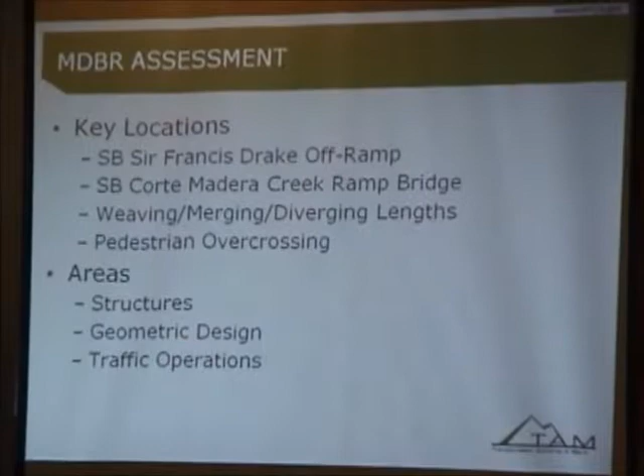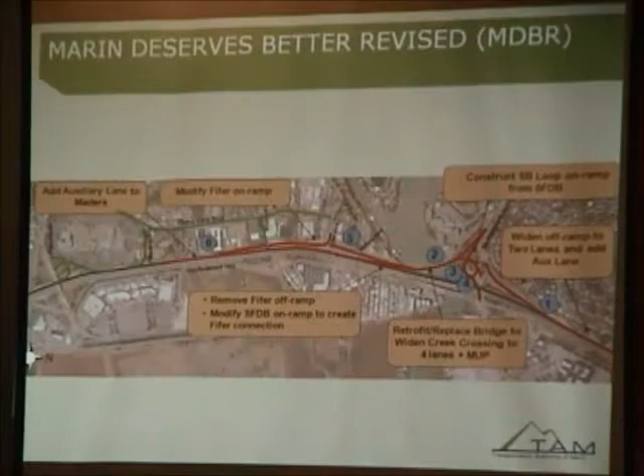This one's a little hard to see, but it shows the Marin Deserves Better southbound option. I'm pointing to Tamalpais Interchange. What's highlighted in red is the southbound improvements proposed by the Marin Deserves Better group. There are some interesting concepts in there that we looked at and found very intriguing.

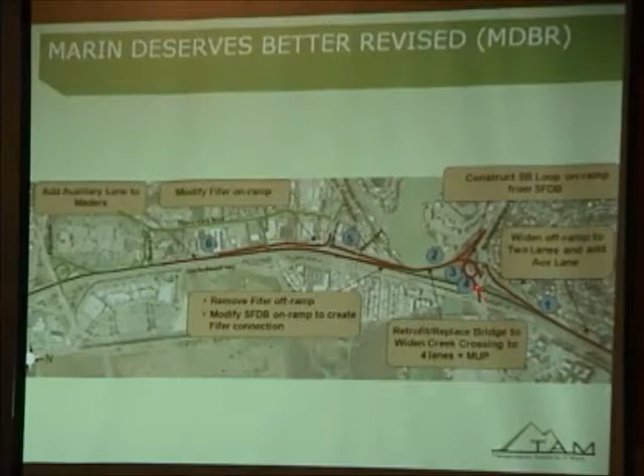What we found technically is that with this option, there's a need for widening the off-ramp at Sir Francis Drake and adding an auxiliary lane for southbound 101. That means actually widening the freeway with another lane on the right side. The feature also includes a loop on-ramp, a 2-lane on-ramp from the east side, and a 2-lane on-ramp from the west side, crossing the bridge, then connecting onto the freeway with 2 lanes merging to 1, then off-ramp to Fifer, and then on-ramp from Fifer to southbound 101 to Madera.

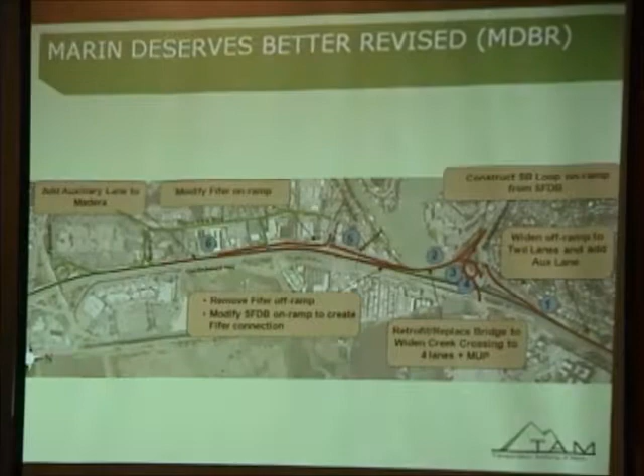The first location we looked at is the southbound Sir Francis Drake off-ramp. This is 101, and this is the southbound off-ramp to 101. For this particular proposal, looking at traffic volume from 2035, it shows that we need 2 lanes on that off-ramp. It also shows that we need to widen the freeway on southbound 101 approximately 1,500 feet, to get close to where the soil nail retaining wall currently is on southbound 101. This is needed because of the volume of traffic coming down from southbound 101 to that off-ramp.

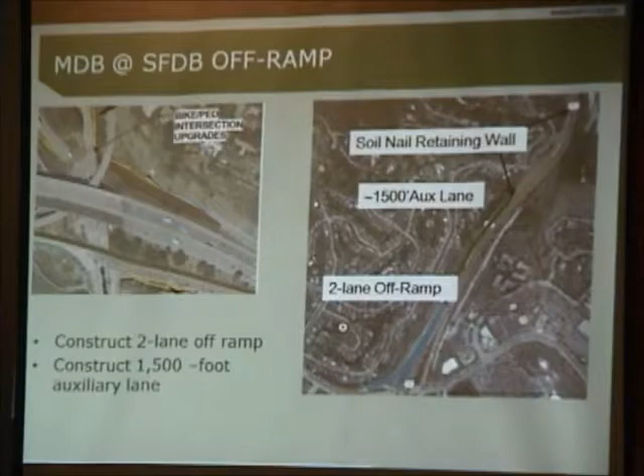The second location is the question about the bridge crossing Corte Madera Creek. We are asked to assess if we can handle widening to 4 lanes as proposed by this concept. That's actually 4 lanes plus a multi-use path, or MUP. The dimension we looked at is about 75 feet. That's looking at reducing shoulder width, because we want to make sure the width is as minimum as we can make it. We found that this width is more than the width of the current bent cap, or the elevator you see out there.

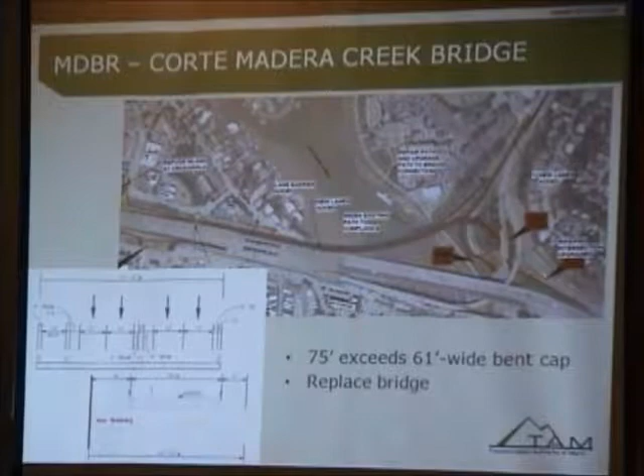The bent cap is about 61 feet. So we had our structural engineers take a look at that, and they reported back that with that amount of widening, the structure does not have the load carrying capacity. They're also concerned about seismic lateral movement of the structure. What they told us is that you could widen to the width of the bent cap, which is 61 feet wide, with some major retrofit of that structure. So with this particular option of a very wide structure, 4 lanes plus the MUP at 75 feet, you do need to replace the structure.

The third location we looked at is operations, which is really key to consider. With the concept at this location, there's a loop on-ramp. The concept is very good, however, when you start looking at traffic volumes for year 2035 and how it operates with those volumes, the loop ramp demand is 1,300 cars. The loop ramp is about 80 feet in radius, but ideally it should be at least 150 feet to accommodate that amount of traffic.

With that smaller loop, cars will not be moving as fast, and you will have some cars backing up onto Sir Francis Drake. We recognize - I wish we could make this much bigger - but with the constraints we have with the wetlands in this area, you sacrifice the capacity of that loop on-ramp.

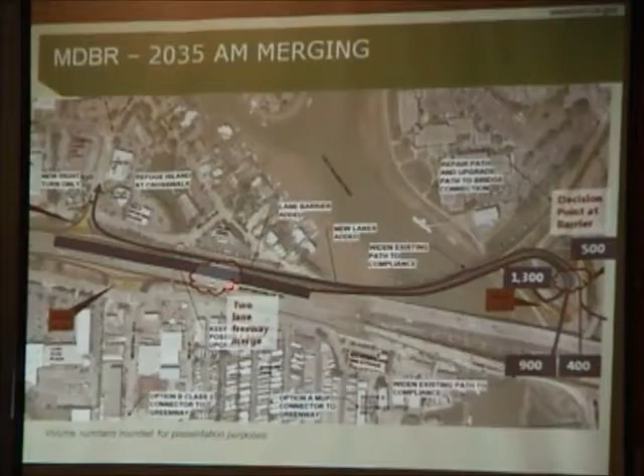In this section, as traffic enters and crosses the bridge and comes onto the freeway, we have a situation where 2 lanes come on and drop to 1 lane on the freeway before entering southbound 101. When you look at volumes, it's very heavy in that movement, so you have 2 lanes trying to squeeze into 1 lane before getting onto 101. That will create congestion on the freeway and also potentially back up traffic onto the ramps.

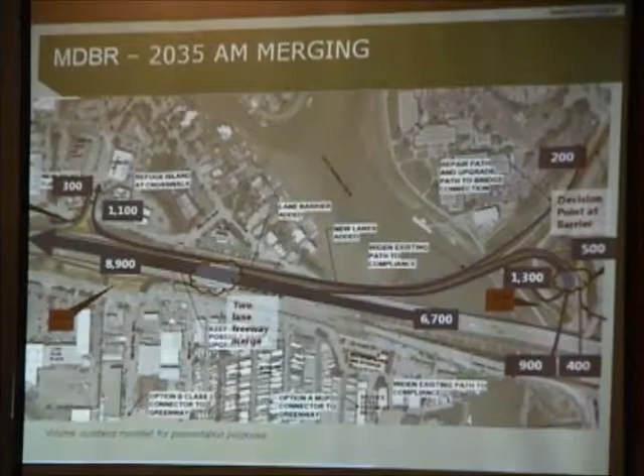Okay, this is another more blown-up shot looking at the loop on-ramp. We took a real close look working counting to see what kind of weight we could put on that loop ramp. The challenge and constraint is the environmental wetlands there. You can mitigate that and put a bigger loop in there.

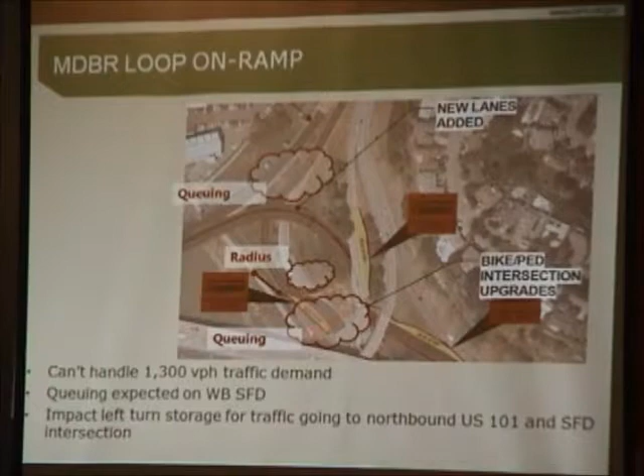Another consideration is the left turn location over here. There's currently traffic coming from the west that would queue on the left turn before getting onto 101. That's an important consideration because if that traffic backs up at the intersection, it's going to affect the whole operation leading up to the loop, and the traffic mix of the loop on-ramp traffic.

What's the purpose of the loop? The purpose of the loop was to provide for a movement from the west onto southbound 101.

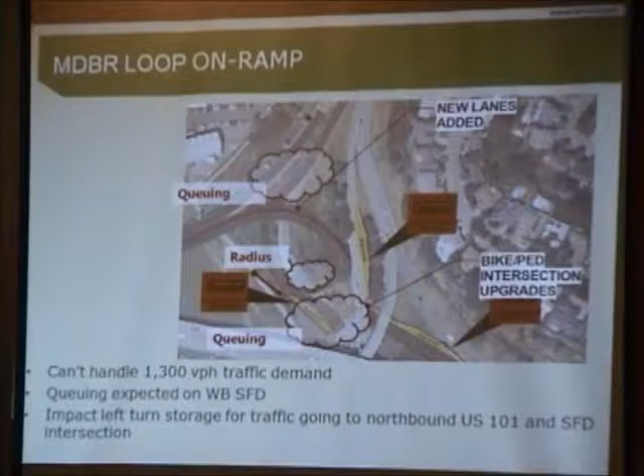Thanks, Brad. The fourth location was the POC. The question that was asked of us is, do we fit in the lanes needed and still maintain the POC?

What we found is we drew it up. This represents a geometric drawing of it. What it shows is that we're very close to that POC. We could fit it in with some design exceptions.

However, we're looking at how we really want to save that POC if we can. You need to look at what's happening at the northbound side as well, so you need to look at improvements on both southbound and northbound when you look at the POC.

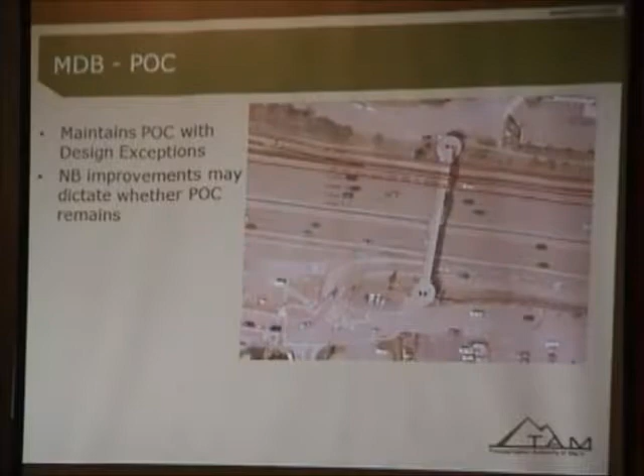So in summary, there are design exceptions. Like any design, we look very closely at designing everything to standard. There are situations where sometimes you cannot, and when you do design exceptions, you need to look at a lot of different factors in justifying it - traffic, environmental impact, right-of-way impacts, and the right combination of design.

The MDB already has a nice feature where they have a 2-lane coming off of 101 to Drake. You need that because you don't have the one off-ramp with the design.

The loop ramp that I touched on needs to be much larger to handle the capacity of 1,300 cars. The bridge needs to be replaced, unfortunately. However, there are ways to replace the bridges.

The bridge is reaching its service life, and so replacing it will be costly.

The weaving distance is another key point that I didn't really get into - when the Fifer on-ramp comes onto the freeway, and then there's a getting off at Madera, there's a short weaving. That section, although there's less traffic, needs to be further studied.

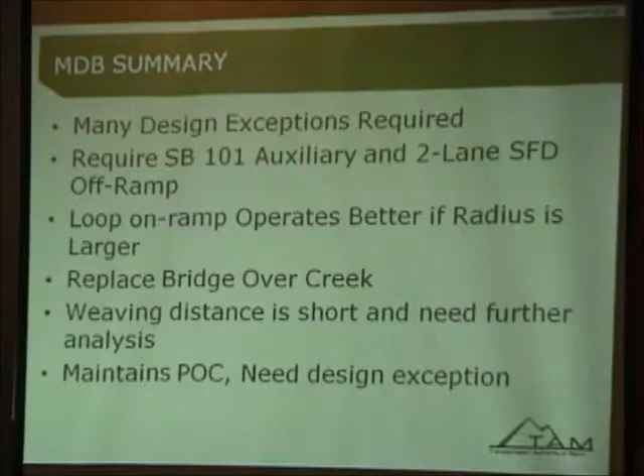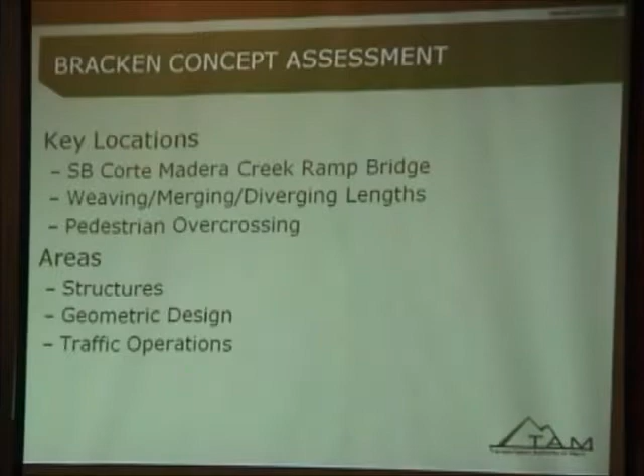Let me touch on the Bracken concept and summarize the assessment. Similar to before, we looked at the various locations, we looked at the bridge, we looked at the operation, we looked at the POC.

This slide shows the Bracken concept. It's pretty similar to the southbound option in that the concept tries to collect the traffic from the west and east as they cross the bridge. The Bracken concept has 3 lanes plus a multi-use path, and then provides an off-ramp directly to Nellen. David did that to try to provide that local movement from this side to the other side here.

However, when we start looking at drawing this up closer to geometric design standards, we find that we have to grade the ramps. And that's kind of where we got stuck, in terms of our current southbound concept of graded ramp and elevated structure at this point.

This one also creates a situation where there's a short weave from the on-ramp of Fifer to Madera, which is a concern, but we need to look at the operations to better assess that.

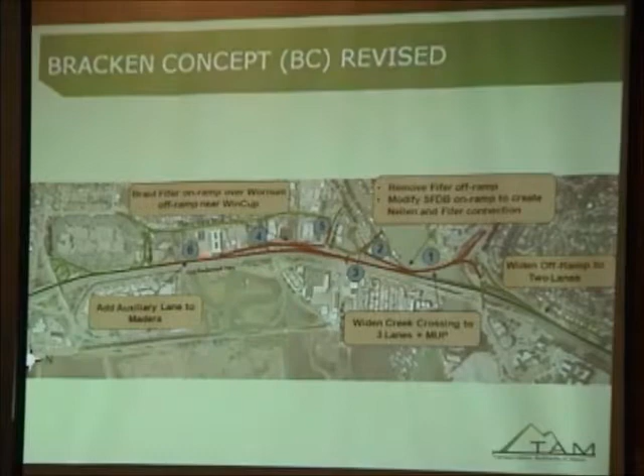Now we also looked at traffic operations, 2035. The numbers you see here are the forecast traffic volumes for 2035. The first point I want to highlight is this location here. There's a short weaving distance on the bridge. You have quite a bit of traffic coming from the west, 1,400 cars per hour, and 1,900 from the east side. They converge in a 3-lane section, and they have this weaving. There's 3 lanes of weaving here. We see this as a problem where that will back up traffic all around.

There's also a weaving section on the freeway because you have quite a bit of traffic coming on, and then you have an off-ramp to Wornum. But this is again short, and that will compound the issue with the capacity issues on the freeway. This in combination creates some congestion and backups on the ramp. Then further south, at the on-ramp to the area, you also have a short weaving distance.

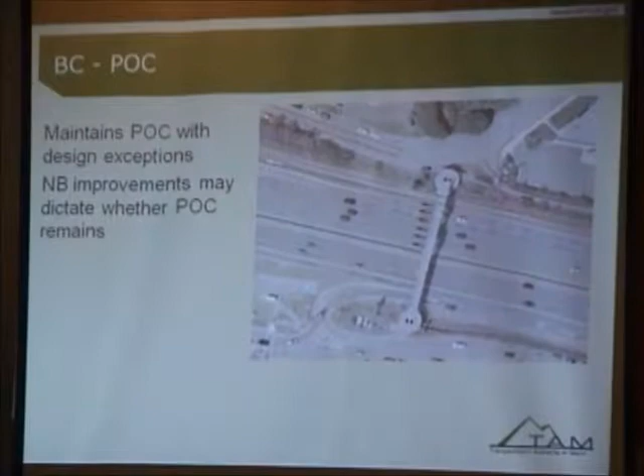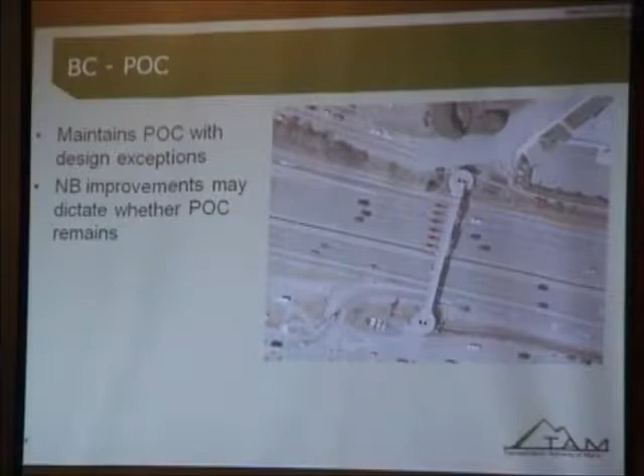In terms of the POC, we took a closer look at that as well. We drew it up and found that you could maintain the POC. Again, you need design exceptions - reduce shoulders, maybe reduce lanes. But the key point here is that with the southbound, to save the southbound POC, you need to save the POC on the east side. So you need to factor both into your consideration.

So to quickly summarize, I'll touch on those points. Design exceptions are needed. The bridge could accommodate 3 lanes with a multi-use path by just retrofitting the bent cap. Weaving is the issue here with this concept. You've got weaving on the bridge, weaving on the freeway, weaving on the Fifer on-ramp to Madera. And when you draw it up, you basically have a braided ramp.

The reason for that is the Wornum off-ramp has to be such that there's enough distance so that traffic can make that left turn from the Wornum ramp into Wornum. So that, in combination with the structured columns and the sight distance of the intersection, dictates where that intersection needs to be. And again, it maintains the POC with design exceptions.

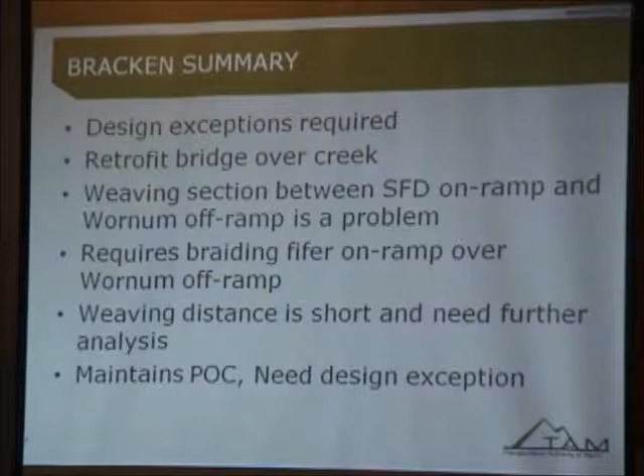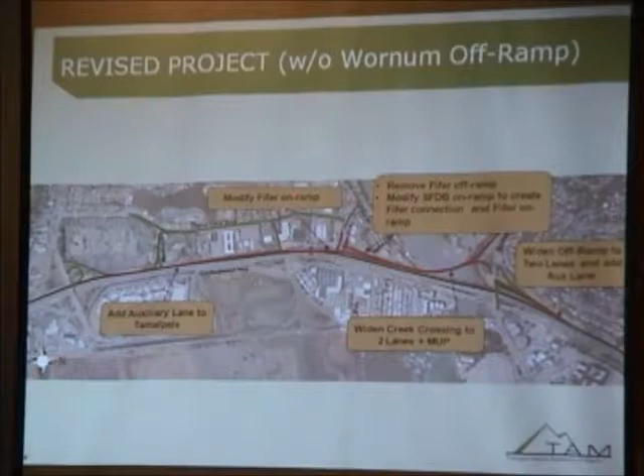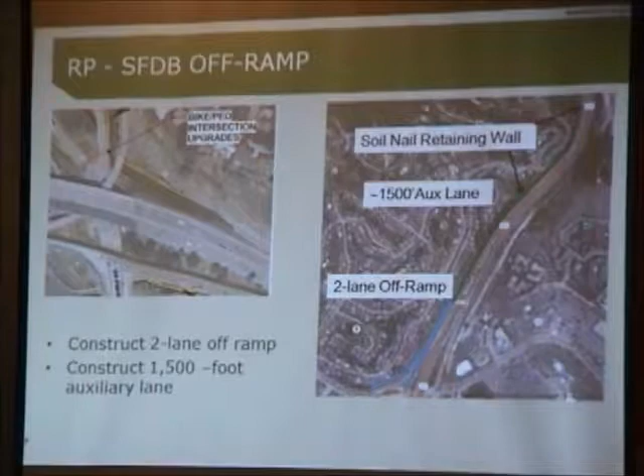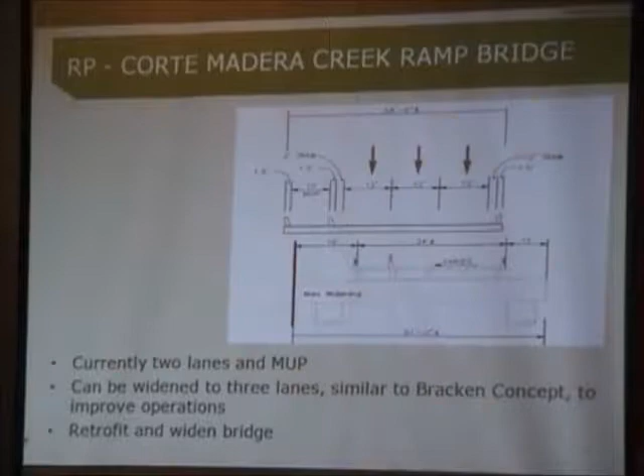However, because the structure can accommodate 3 lanes, the 3 lanes give you better operational characteristics with added capacity.

Now, this looks at traffic with the southbound revised, looking at the concept itself. Again, we're trying to handle the traffic coming out from the west and from the east with 3 lanes in this section. You may ask, how come that's the same as Bracken? However, the design is different. The design actually provides a much longer weaving section because the ramp comes off and connects to Fifer and is separated from the freeway. So in effect, from where the 2 ramps converge all the way to Fifer, you have room to handle the weave. Because of that, it handles more volume.

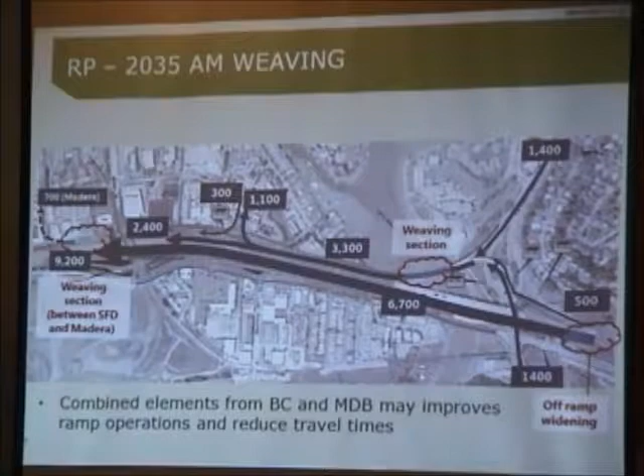This one also has the issue of the weaving section from the Fifer on-ramp getting off at Madera. What was done on this one was to mitigate that by extending the aux lane all the way to Tamalpais, which is not in the current permitted design or Bracken version.

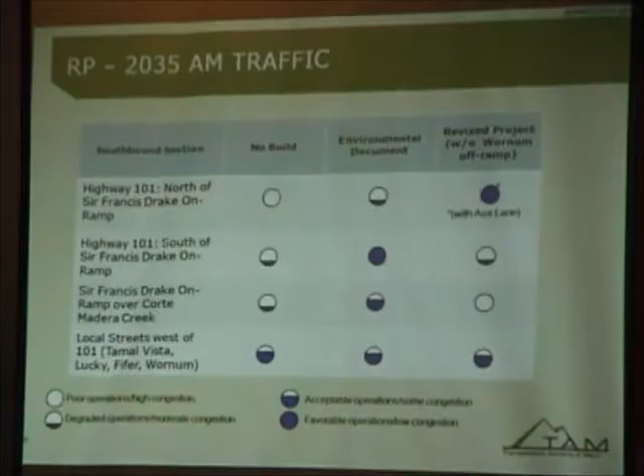I'm going to have Matt touch on the traffic aspect. We did a sensitivity analysis looking at traffic operation of the southbound revised, which is, again, southbound C without the Wornum structure.

Thanks, Guy. I'm just briefly going to talk about our comparison of this revised project without the Wornum off-ramp, to evaluate the traffic operations.

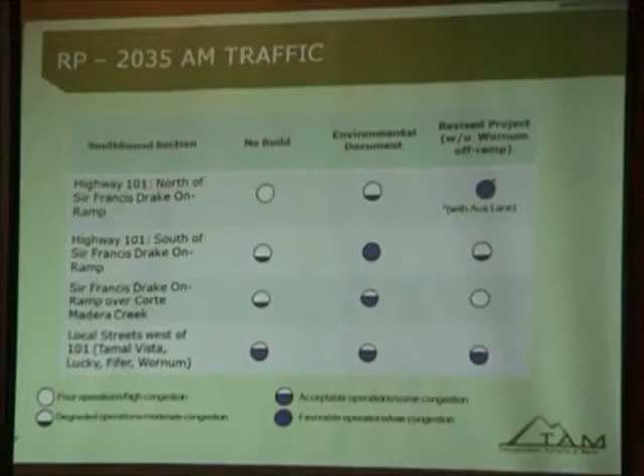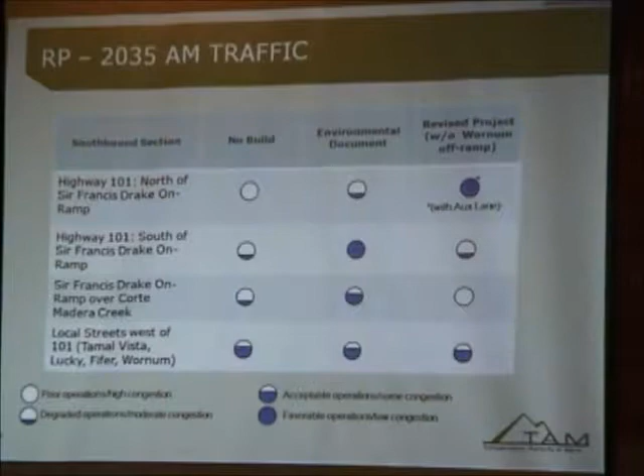So as you can see, when we do a comparison across the no-build, the environmental document project, and the revised project, the operations improve a little bit when we're looking north of Sir Francis Drake, and that would be due to the auxiliary lane that would extend through that area and improve operations up there.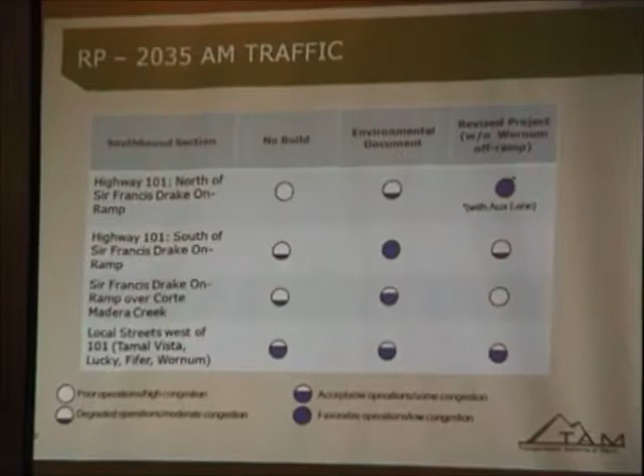However, when you look down south of the Sir Francis Drake on-ramp, you would have similar operations in the no-build and revised project, due to the weave section in between the new on-ramp and the Madera Boulevard off-ramp when you don't have that Wornum off-ramp as well.

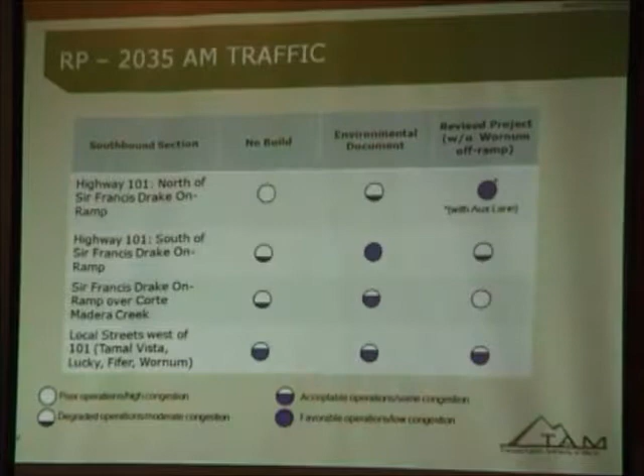When you look at the Sir Francis Drake on-ramp, the actual on-ramp section, you're going to see worsening operations in 2035 compared to the no-build, and that's due to the increase in traffic that would be using the Greenbrae off-ramp as well. Finally, local streets are expected to be pretty similar between each of the different alternatives.

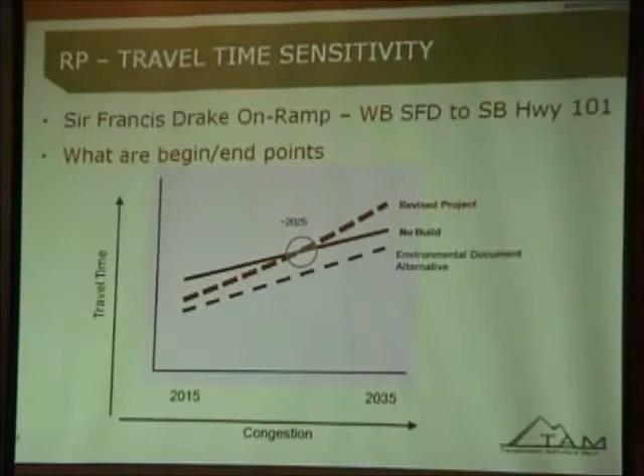We did do a sensitivity test to look at travel times coming from Ross Valley and found that, as I mentioned, the on-ramp from Sir Francis Drake would in fact be a little bit worse under the revised project, due to the increase in traffic using that on-ramp. However, we found that around 2025, if we extrapolate between when the project could be built in 2015 and 2035, the revised project would be about similar to the no-build. Then as traffic increases, it could get worse, and travel times could get worse on that segment.

Now I'm going to pass it back to Kai to wrap this up. Thanks, Matt. I'm sure you can ask a question about Matt's summary here—it's very complex in terms of what he did, but feel free to ask questions on that.

In summary, when you start looking at all the southbound options, I see some really good features in all the options. With the ability to widen that structure to 3 lanes, you have the ability to do some more in terms of addressing the issue Matt talked about, travel time for traffic coming from Ross Valley, Larkspur, onto the freeway. 40% was the travel time from the on-ramp to the off-ramp. Currently we only have 2 lanes; with 3 lanes, there's a lot more we can do.

From a design standpoint, a geometric standpoint, taking away the water wall frame structure opens up the opportunity to move the 2-lane collector closer to the freeway, thus opening more space where you can look at the possible POC while keeping the public right of way.

In short, we want to do some more evaluation of traffic operations, looking at all the key elements of the Marin Deserves Better and Bracken plan. Because, like I said, there are some really good geometric features. What's lacking is the traffic operation looking at all the combined features.

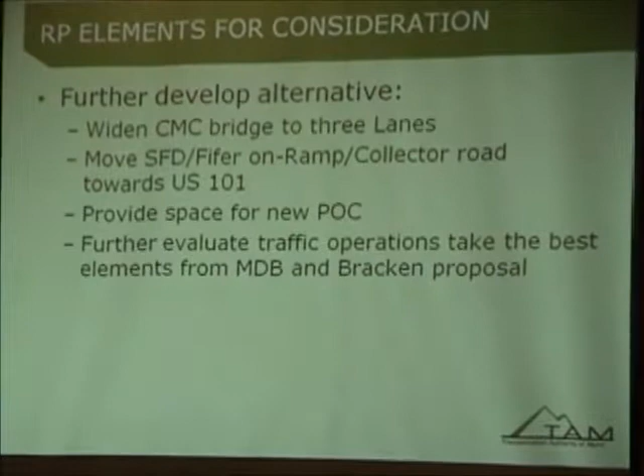Let me just mention this last slide for a second. In pouring through the various technical features of the southbound corridor—and it is complex—we have an original proposal and some new options we've considered. I want to emphasize to the working group that we think there might be a combination of features from the various proposals that could result in a project with a good life, a 20-year life for the investment, and that doesn't make traffic worse, which is what we're trying to do, or relocate the hazard from the freeway to a bridge or from the freeway to a collector road. So our instincts are to try to develop a package that takes in features from all 3 of these proposals. We'd like to spend a little more time on that and bring it back to the TAM board. We don't have all the details worked out, but we're hopeful.

So we're going to open it up to the working group for clarifying questions and/or proposals that you'd like the working group to consider. Go ahead.

On the information on the slide in front of us, would you be able to give some idea of the additional environmental review that would be necessary beyond what is in the current draft document? And would you be able to give us a range of costs for those elements?

Let me do the best with the information I have. With this proposal, the environmental document defines a certain limit of study for environmental review. This one requires the auxiliary lane on 101 to the north, which I believe is outside the study limit for environmental. So there's an environmental updating of the traffic report and assessment of impacts needed.

Could you repeat what you said about the auxiliary lane? Okay, the auxiliary lane goes up to where the Sorrel Neal wall is, so it goes further north on 101. Towards—not all the way to Santa Fe, let me make that clear. You know where that very high Sorrel Neal retaining wall is? There's a sound wall, a very high wall, right up there, but it's north of Sir Francis, and because it's beyond the limits, that's created a question that you need to update your environmental technical studies.

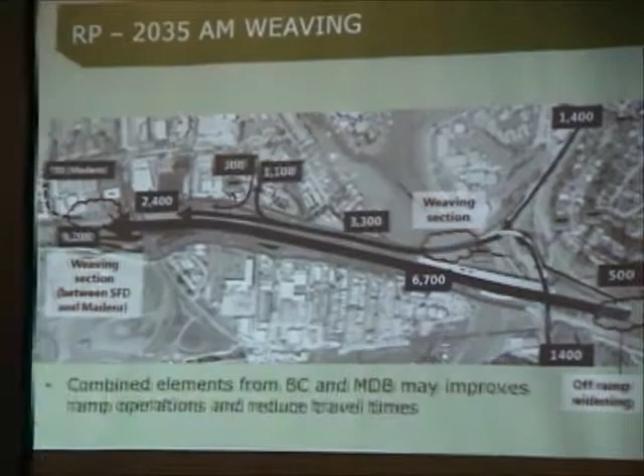Now, with the environmental document revised option, what we have is this situation. Sorry, let's look at the volume. This is 2035 volume - 1,400 cars coming on from this side, the west side. You have 1,400 from this side. They're pretty much balanced there. They come in and they have to merge on the bridge.

So the proposal is to widen that to 2 lanes to handle that volume. With the 2 lanes, now you're looking at 2,800 cars - this plus that, 2,800 cars in a 2-lane section. That's pretty close to capacity there. However, what we did is extended that lane from this point where they meet to Fifer, adding a lot of extra distance so that traffic has more time to make that move, and also local traffic that's coming out can get on and get off to Wornum or to Fifer.

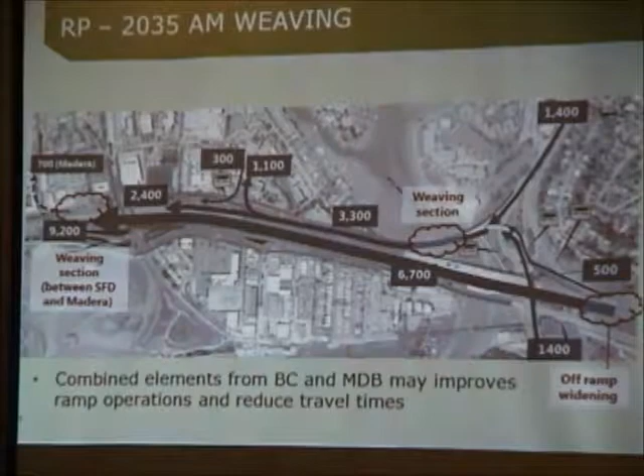So that's the difference in terms of separating from the freeway. Let me answer this also with the 500 number right there.

What we're looking at in the revised build option is eliminating the flyover to Wornum. So all the traffic wanting to exit has to get off on Drake. Eventually, those signals on Drake have to accommodate more movements, and you're putting everybody now on the Corte Madera Creek structure, which is eventually going to cause a backup onto Drake if you don't do anything. Without the flyover, by about year 10, the backup on Drake is going to start to get worse than it is now, because you're taking all the traffic headed for Fifer Lucky and putting it on the same structure, loading it with more traffic than there is now.

What the team recommends in that last slide is that maybe if you widen the creek bridge to 3 lanes, you can mitigate that somewhat—the same 3 lanes that the Bracken alternative mentions. Maybe if there's a way to sort that traffic from local to regional, like Marin Deserves Better recommends, that would help too. So there are features of all 3 of these options that could work better. But the reason it gets worse than the no-build is because you've eliminated the Fifer Lucky off-ramp.

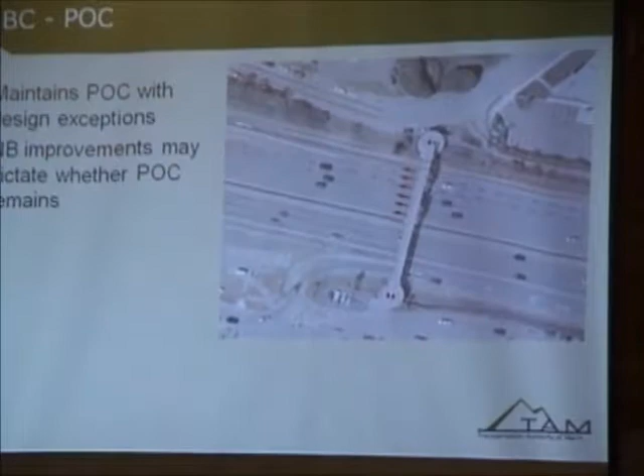Yes, so it's coming from the right side. So what that does is it creates another weaving section. That's very informative. So the concept, and I see where he's coming from, when you're on a field, you're looking at it. The freeway, I'm trying to find my pointer, I'm sorry.

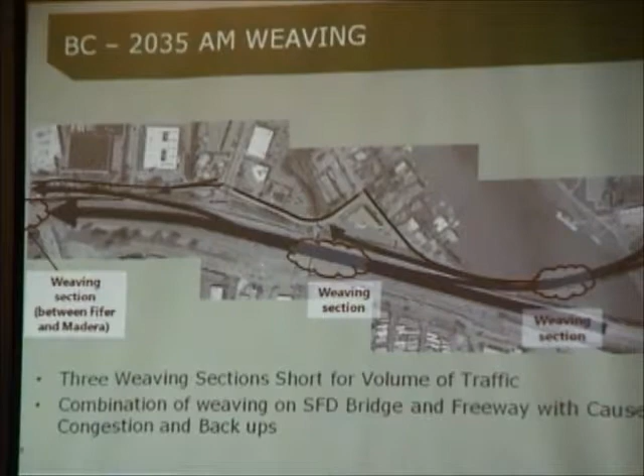It's over here. So over here, this is the side that's north of the interchange and where the off-ramp is. So what David saw was the opportunity to connect from that off-ramp in the middle of the freeway and the off-ramp, connected onto this structure on the right side.

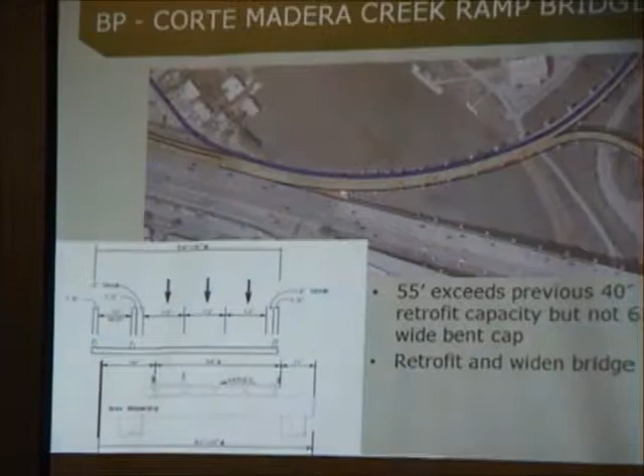Now, the concept looks okay. However, we start looking at what does that mean. Is this a separate structure? You also introduce traffic coming on the right side as you have all the traffic coming onto the freeway on the left side. So you're pushing a lot of traffic together.

A standard design would be to take that off-ramp on the outside, come around, and tie in from the right. And I think Jacob looked at that, and that was pretty substantial in terms of impact and structure costs. It's pretty major in terms of the impact of that.

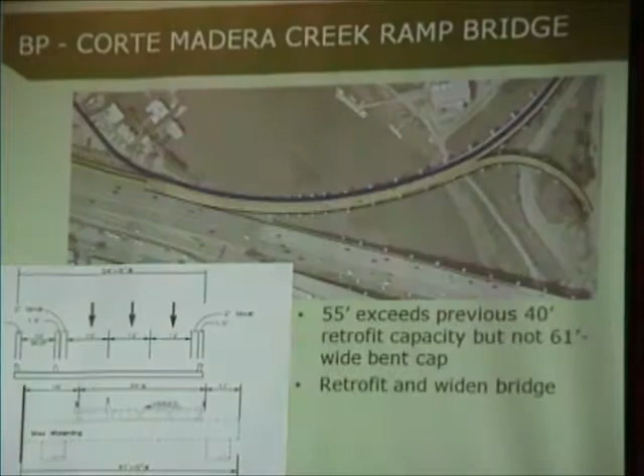Well, it would seem to me that there might be a happy medium, which is a concept like the Marin Deserves Better loop, so that you have all the freeway-bound traffic winding up on the left side of the ramp over the bridge crossing. And then if you bring the cars from 101 kind of up the middle so that they wind up with the local traffic, which is on the right side of the creek crossing. Just want to throw that out there.

Well, I like the concept in terms of the loop, what they're trying to do there. It makes a lot of sense. It's just that we start looking at the operations and traffic numbers, that loop is too small. And I'm concerned about the backup traffic on Drake and losing the benefit of it.

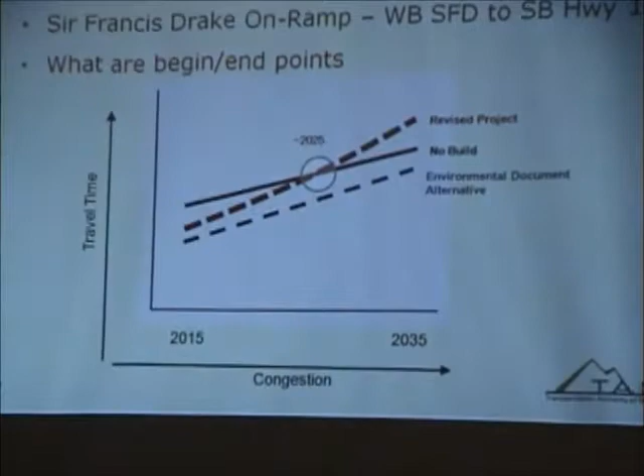It doesn't seem to be responsive. Well, what we've done is a quick sensitivity test to try to find where we're matching the no-build scenario to the revised project. That was really our initial step, to give you a sense of that.

Let me understand what my sense is, because looking at this, I don't know if the spread is 10 minutes, 5 minutes, 2 minutes, or 10 seconds. Of course, we're talking about a range of, like, 2 to 4 minutes or so, between the revised project and the no-build.

And what stage is that? That was in terms of how long it would take in the future versus under the revised project. It's in that range, but we'd have to study that further. That's the scale we're talking about - we're not talking about 5 minutes. Let me try to articulate that.

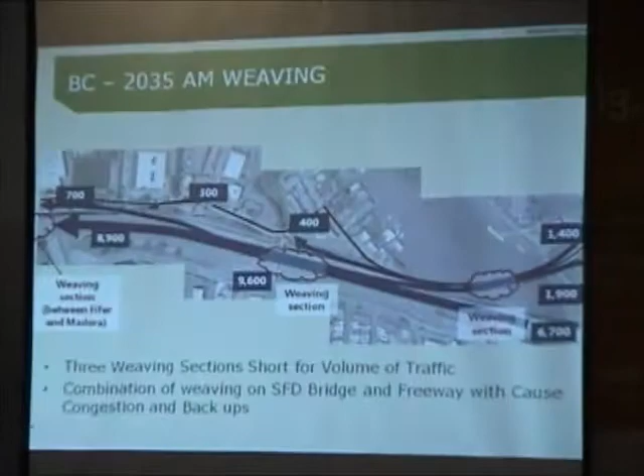Thank you. I kind of like this because it simplifies it. Everybody knows by now I'm not a traffic engineer, so I sure like that. But I'm not certain how to read revised project. So Francis, third item down, Sir Francis Drake on-ramp over Corte Madera Creek. And I guess there I was assuming it was with three lanes, so maybe that's part of the confusion. But nevertheless, it says that it's poor operation, high congestion, and yet I guess I was reading 3 lanes, so I didn't understand that whole circle.

Okay. Let me give it a shot. Sure, this is a pretty complex matrix here. And the assumption is that there's 2 lanes crossing the river, or the creek, 2 lanes. And the way it's set up is that it looks at one section to the north of the Drake on-ramp, a section to the south, and a section where it connects to the freeway.

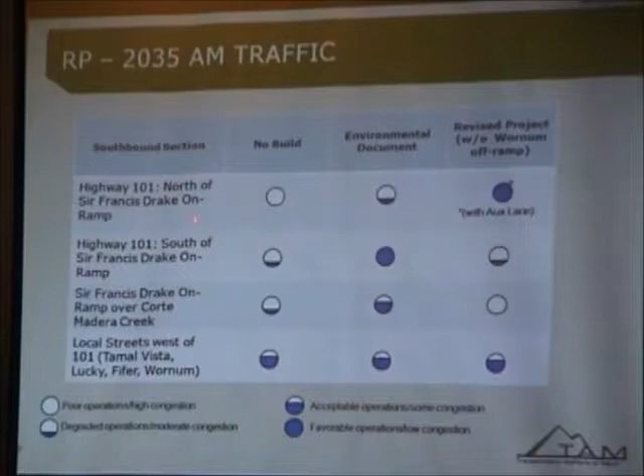The section to the north, I was talking about adding 2 lanes to the off-ramp and the aux lane on southbound 101. So this refers to comparison of that section to the north of the Drake on-ramp. With the no build, you have the worst condition. With the current environmental document option, it's better, it solves some of that problem. Now, with eliminating the Wornum off-ramp, you need to add the 2 lane and the aux lanes to make it better. That's what this is saying.

Okay, then in the section to the south, this is where the crossing of the creek. But that's my point, that currently we have 2 lanes. With 3 lanes, we can actually make it better.

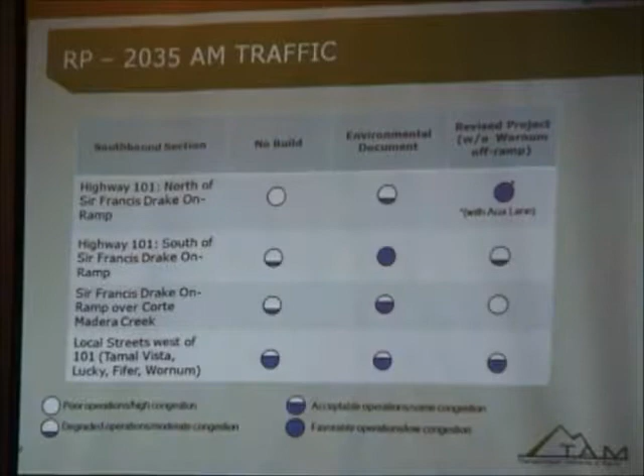And the reason for that, what Diane's talking about, the Wornum off-ramp, you have to put more traffic on the Drake off ramp. Now, you have more traffic on the Drake on-ramp, that means you need to take care of the freeway section to the north. Then you also have to factor in that there's more traffic crossing the creek, before you get onto the freeway to the south.

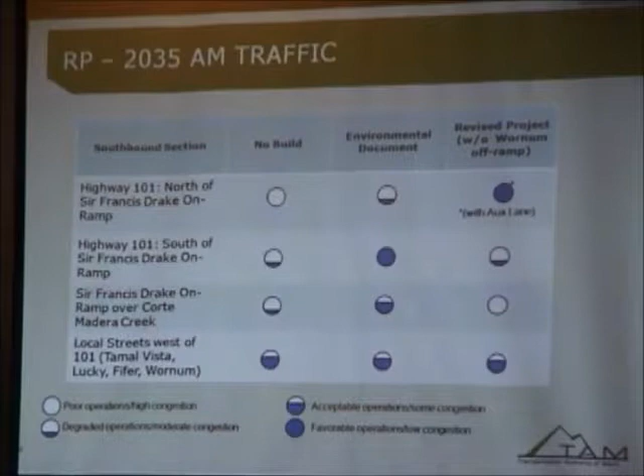So take a wild guess, if we had 3 lanes, which I guess is part of the conceptual, how would that impact that far right column? We haven't completed the traffic study, but I'll give you my gut feeling on that. With 3 lanes and proper channelization, you will reduce the travel time. Yeah, I understand that, but how would it affect that far right column?

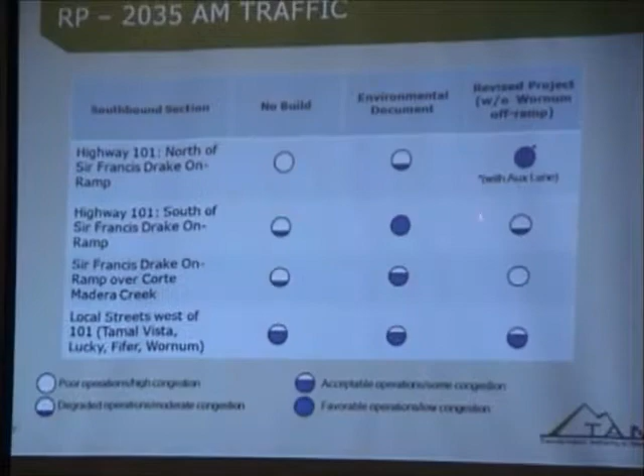Okay, let me do that. Again, give you my opinion about the traffic analysis. This is the same, the top was the same, as we're adding the aux lane and the 2 lane off ramp. In this section here, south of Drake on-ramp, with 3 lanes, this will get better. This will probably be comparable, because we added 3 lanes on the creek bridge.

As you come down further south, you start looking at operations on the freeway. And that's the function - right now the environmental document with the Wornum off-ramp is better. The reason is that you have a lot of traffic to get off at Wornum. With the revised project without the Wornum off-ramp, you have traffic getting off at Drake, crossing the bridge, and getting onto the freeway. However, it's an additional, let's say, redesign of that.

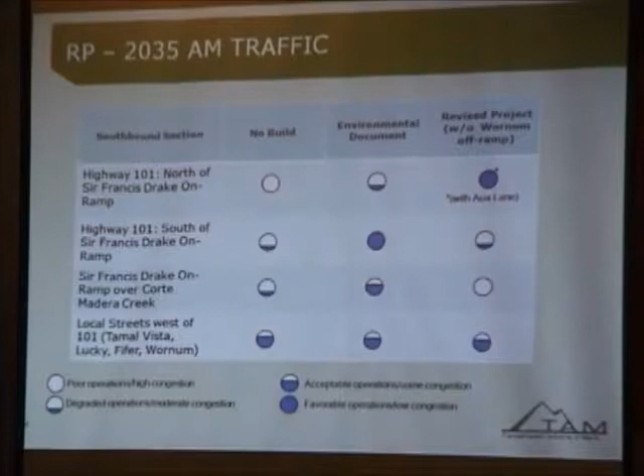And talking in terms of the lane, lining up cars in the right lane, looking at how they merge and converge in terms of traffic operations, you could improve on that with the lane section. Again, that's my gut feeling. So I'm sorry, the third circle would what? I feel this will improve.

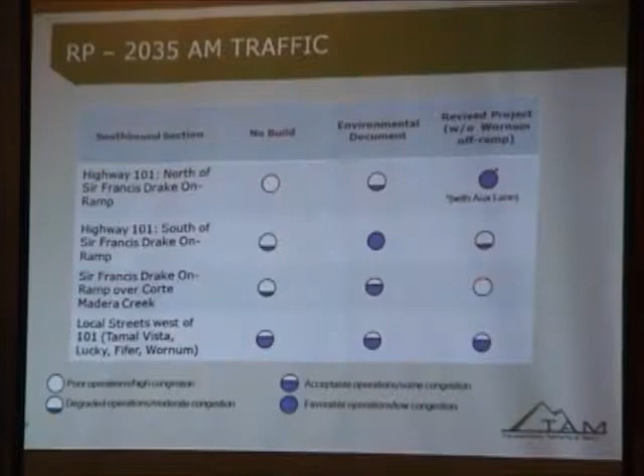That would be comparable, like 3/4 or better. That's what I can tell you at this point. We would have significant improvements, solid 3/4, in each of those.

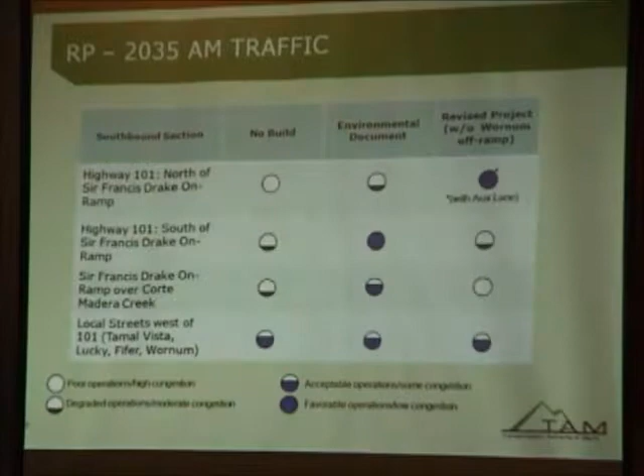I have to qualify that because of additional factors. I understand, but you're the best we've got at this point. Yeah, that's my opinion. But that would be your opinion, is that correct? Yes, correct.

Carla's been waiting, and then we'll check in, and then I have another cue. Okay, well I do too. Oh, you had one more? Well, go ahead, and then I'll come to you, Carla.

I just want a clarification. We've had a discussion about the loop, and Caltrans, I thought—this was my understanding, correct me if I'm wrong—said that it's not going to work because of the geometry. So is that the case or not? I don't know, I forget that.

No, that's correct. There's the traffic operation aspect where it doesn't have the capacity, but there's also geometric consideration, where we don't have the horizontal sight distance on that loop. We also have to contend with the intersection at Drake, with 4 lanes, 2 plus 1, 3 lanes there in terms of how you channelize traffic. So that's the concern there.

So just, we're not going to consider it? I mean, there was further discussion, and I didn't know if that was just talk or not. Well, it sounds like my understanding is that there's not a feasible concept. My understanding is that there's a technical difficulty with that, and there's environmental impact to it to make it any larger than what you see there.

Okay, final, if I could. Regarding the revised plan, I've thought for some time that we should take the best information we've collected through our own observations and others—thank you for doing so—and turn it over to somebody who knows what they're talking about. So my question is, with regard to the revised plan, how was that assembled?